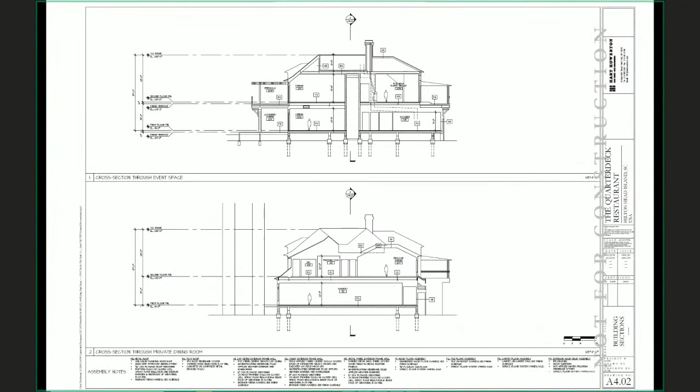Again, it's a little open-ended, so this is a conceptual review because this is a new building. So we'll be looking at this one more time, and at the final, we'd expect to see a more detailed landscape plan. A plan of the building, a roof plan of the building, elevations and illustrations, sections through the building, just a detail of the building.

Sorry. You can see how the porches relate to the dock and the promenade.

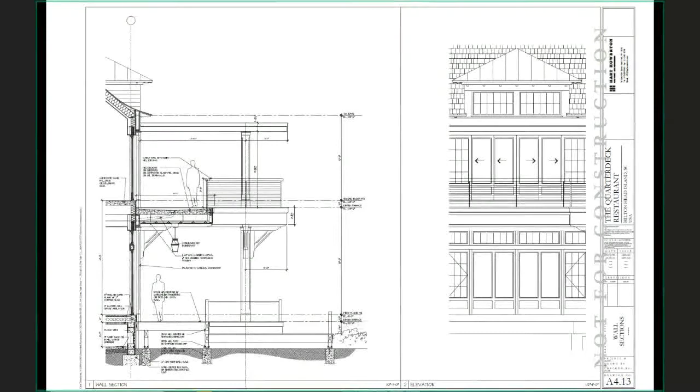Again, more wall sections. This is pretty close to a color board, but I would remind everybody this is a conceptual review.

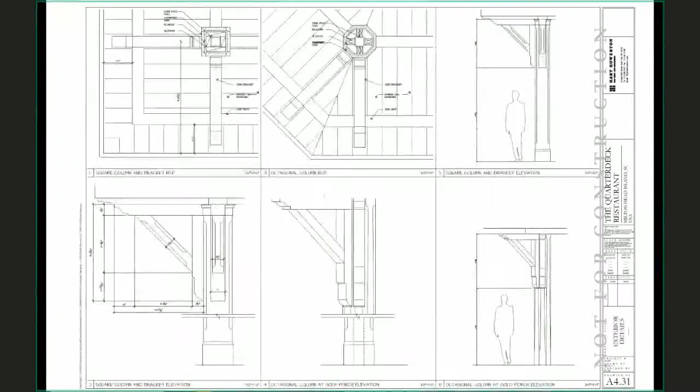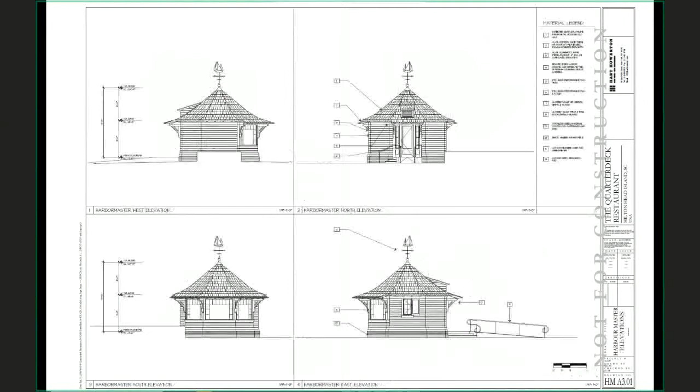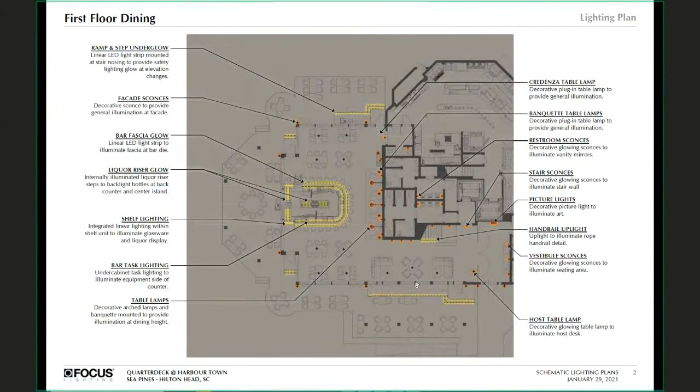Okay, so now we're going into the proposed lighting plan for the Quarterdeck. This is pretty much interior.

Sorry, site lighting. Lighting in the trees, and parking lot lights.

Okay, staff recommends conceptual approval as submitted.

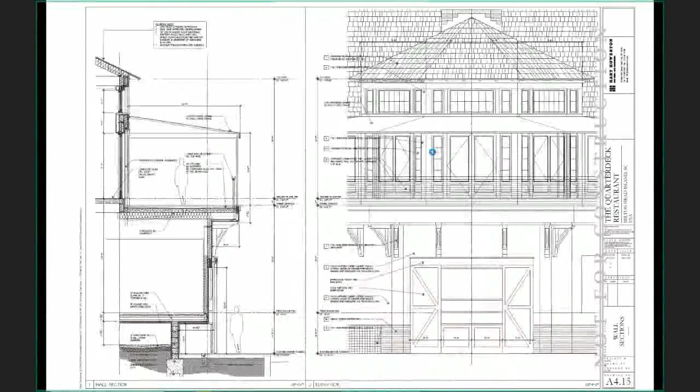And the only lighting related comment I had is for the bollard lights in the parking lot. I was a little curious - I don't have any problem with it - why you guys chose to do that in lieu of a more traditional area light. So if you could respond to that, I was just kind of curious.

Yes, so we're trying to be sensitive to the environment, especially being by the beach there, and wanted to keep the lighting at a low level and indirect.

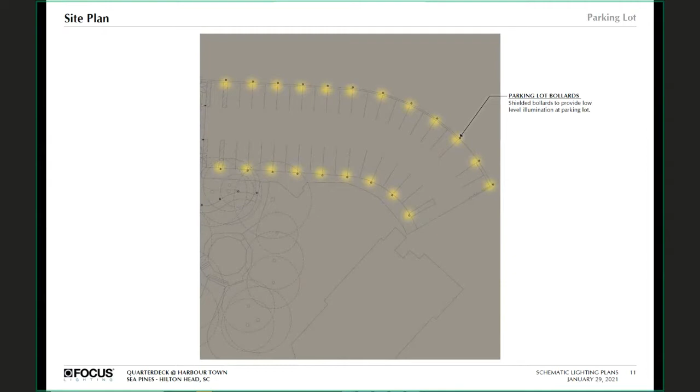Okay, I understand, certainly appreciate that. Of course, we'll be looking for fixture cut sheets when you come back for final. Like I said, I have no problem with what you're showing, but there's going to be a lot of those bollards, so we'll certainly want to know what it looks like. But other than that, I think it's a great looking project, and I believe it's heading in the right direction. Thank you. Great, thank you.

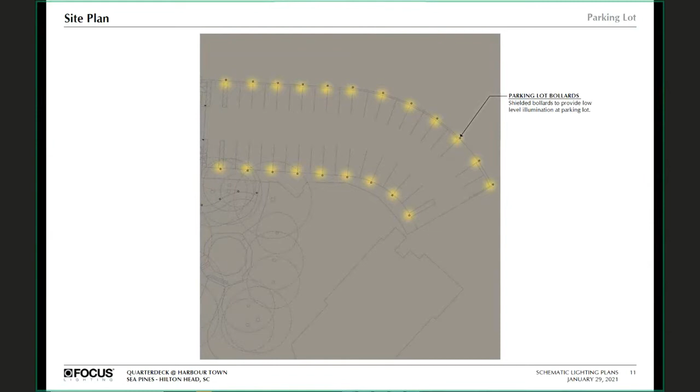I have to agree with staff's comments as far as plantings, and I know that's something that's going to get drilled into for final, especially with some of those smaller cells, just for simplicity's sake. It is pretty nice underneath the oaks there on the northern side, being able to accentuate that. But I know a lot of the beds in the Harbour Town area have pretty simple compositions to them, so if you have that accent, accent appropriately.

I agree with Mr. McAllister when it comes to those shell walls. I know oftentimes a hone tabby treatment is very appealing, and you still get a similar vibe. It's either that, or mixing in smaller oyster shell sizes in the finish can oftentimes reduce those sharp edges.

Especially in this area, you have a lot of different levels, and you still very much have that harbor walk in there. Oftentimes you've got so many people stacked in different places that they're bound to be up against your vertical surfaces. So again, I'd say seek a smoother finish, or a hone tabby would be a great accommodation.

What I would say is more of a transparent handrail, that single rail. Obviously it appeared from the plans that was associated with more of the dining area, knowing that there'd be tables and such. Just being conscious of the drop-offs on the other sides, knowing that oftentimes we see cable rail in those situations, but appreciating that you're trying to keep it a little more open.

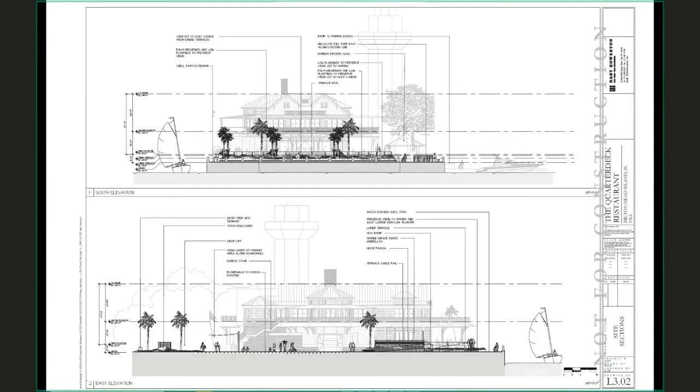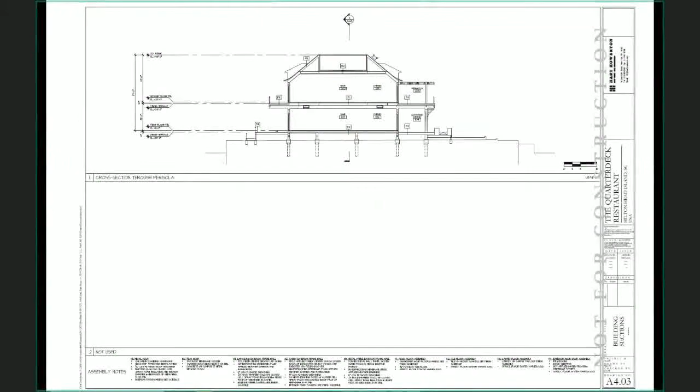And then finally, I was looking at the lighting plan and trying to confirm the thoughts on the string lights associated with the gangway and along the couple boardwalks. Oftentimes, and I think it might be within a lot of the areas around here, string lights are isolated to more of the dining, more of the static areas. So when it comes to running string lights along high traffic areas, making sure we get the coverage we want as far as illuminating things.

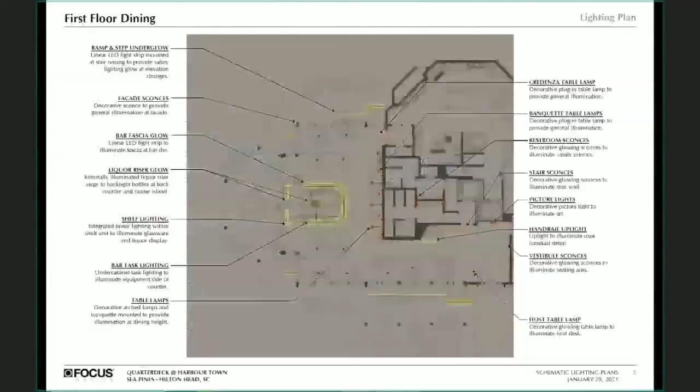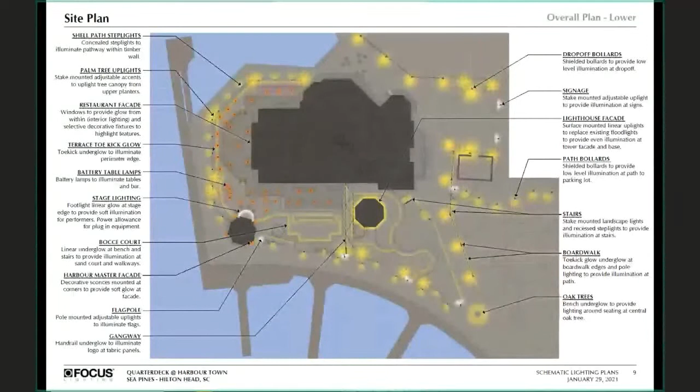Maybe there might be the opportunity, especially on that northern side, of just having more of a lower level light. I'm a little less concerned about the oak trees, the uplighting and downlighting with that—there are really nice ways of being able to do that. So I'm hoping that on that northern side, the illumination within the trees and focusing on the lower level lighting will help out, and maybe the string lights get really focused on more of the dining. I do like the idea of that gangway and the finish that's going to have for the railing.

So I think if that was shown as a section or highlighted in the next set of presentation documents, it would really help out in the understanding. But otherwise, everything looks great. I'm on board with a lot of the staff comments, and I appreciate the effort put forward. If one of my architectural cohorts have something else that sparks a question, I'll be sure to speak up. Thank you.

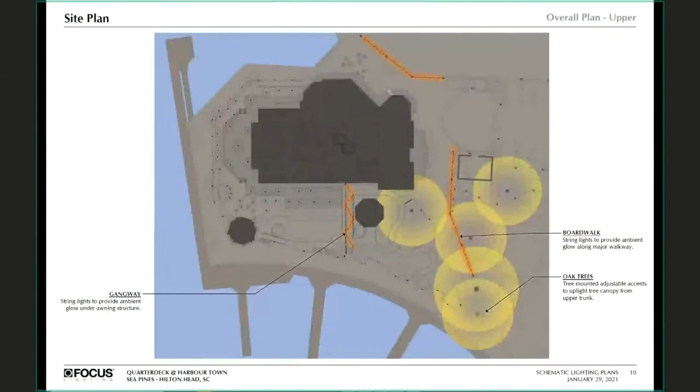So I'm on the architect side, and as you could tell, I initially struggled a little bit to understand the extent of the project, and I'm just going to take it at face value that everything that is getting touched is allowed to be incorporated. Chris, I'm going to ask that you chime in if there's something, but I'm assuming, since you recommended for approval, that changes to the lighthouse entry and all of that is perfectly acceptable within the scope of this project.

That's correct, that's correct—the existing nonconformities, they're allowed to maintain. Okay.

Because I didn't totally understand some of the program, my initial hesitation was about the Harbor Master Pavilion, because when you're on site, the new location does block the view. But I do fully understand that if that's the visibility the Harbor Master needs, then that is, unfortunately, at the loss of the public having that open expanse view. So if that can't shift because of those programmatic reasons, I can certainly understand that. But I do feel that pavilion will close down the view out to the ocean and out of the harbor pretty significantly.

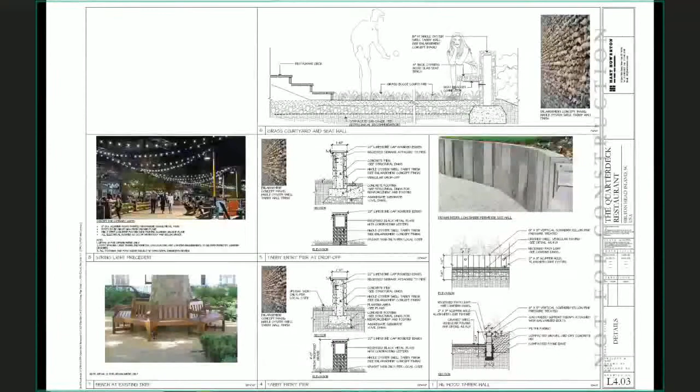The only detail that specifically caught my eye is on the fabric of the guardrail, the proposal of the large Q. I believe that would fall under signage and therefore would have to be a separate submittal. Yep, there it was, the large Q on L4.03. I believe that would have to be a separate submittal, and if that is in fact intended on every panel, it would exceed the signage limits.

Just to note there, that is purely a placeholder put in by the landscape architect. That is not the logo or identity mark for the project at all. Graphic design has not yet begun, so it's just to indicate the intent.

I think it would not be that scale, so we can give you more detail next time. That's what I'm just cautioning—signage is a separate submittal, and there are limits on the amount for the project. I just wanted to mention it because I saw it; even if it's a placeholder and will be smaller, if it really ends up being all around, my gut says—again, you would have to check the math—likely you would be exceeding allowed signage amounts.

Right, okay, understood. This is Chris with the town of Hilton Head. Just to reinforce what Ms. Lippert said, she's correct—you have a limited amount of square footage for signage, and that would count towards your square footage. Okay, understood, thank you.

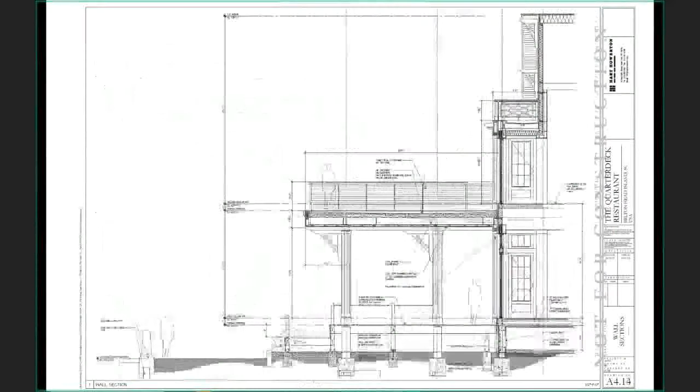Yes, the gas pumps remain. There will be some work to them, but they essentially stay in approximately the same location. And the harbor master's office itself is up 3 risers, so it's up about 1.5 feet from the shell path.

And once you get out to the line along the channel, we have an 8-foot required clearance, and that's for maintenance along that area. But those are our required easements. So everything about the harbor master, including its eave and the steps and the ramp up to it, all stand back from that setback.

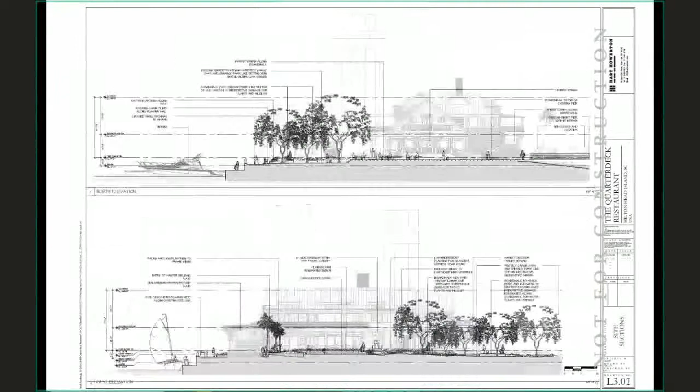So there is a market component to the program, which is a carry-out shop that would have sundries, some food, groceries, as well as a to-go counter related to the kitchen. You could order seafood and other things hot to go out of that market venue. Also, there's an existing ice cream shop in the quarterdeck building, so ice cream would be offered inside the market.

That's positioned so it faces north onto this boardwalk extension. There's an open porch that you can go up and directly into the market there. The market also connects back into the restaurant, so if people want to finish dinner and go straight in and have some ice cream, then go for a walk outside, they can do that through the market as well.

Oh, I know where the ice cream place is. You don't have to worry about that.

So what I was kind of leading to is, in the summer months when it's crowded and someone checks in, where's the dedicated area, if you will, for the families to hang out with all the kids that can't sit still for 5 minutes? Is there a little run-around containment area or something?

Yeah, I was probably one of those kids in my life.

But yes, so we have this gangway experience where you go up to the front door, and once you go in, you're not yet in the restaurant, you're in this reception area, which would have a bench, some art. It's a fairly large space in there. Those doors that you see swinging are overscaled. The main entrance door is overscaled, so there's space in there to wait. There's also this sort of network of paths.

Of course, now everybody's on OpenTable, you get a text message when your table's ready. So some of these paths, the boardwalk experience, maybe even going down to the corner to look at the harbor master area, are all diversions while you're waiting.

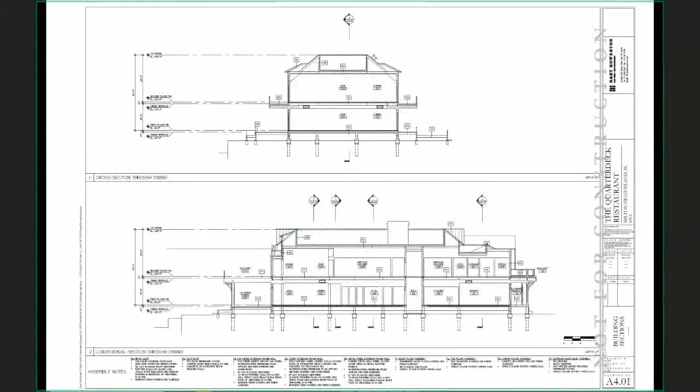My comments come back to the standing seam roof. I'm not a fan of standing seam roofs unless they're non-reflective. I agree that there's too many of them, and that could be cut down, or if you could bring in a painted color for those standing seam roofs so that they're not reflective. I'm going to be totally against reflective standing seam roofs because it'll take away from the beauty that you've got and from the view from the harbor. The boats coming in don't need to see that kind of shining example.

The white sand, and this comes back to a comment I had in mind, and I think John said it earlier - this place doesn't need to match the clubhouse. The clubhouse is in a nice forested area, it doesn't have that many buildings around it. And on the harbor, we've already looked at projects where people are trying to work with that original Portofino concept. This thing is kind of looking like the clubhouse and not looking like it belongs in Harbor Town. I didn't want it to look like the project we just approved on those colors, but all the buildings, the shops, all the way around there have more of that Portofino look. It's subtle, and that's good, but this one is stepping way back from that. While I really like the look of this building, I'm wondering if you shouldn't bring in some more of that Portofino look. That's my opinion.

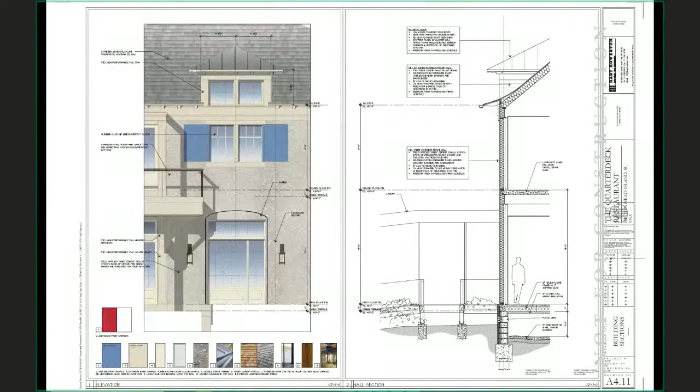Kathy? All right. Yeah, a lot of good comments, and I think everybody pretty much covered everything. My only critique is the multiple style of dormers that you've got going - you've got some gables, some sheds, and some hips. I'd just as soon see that limited.

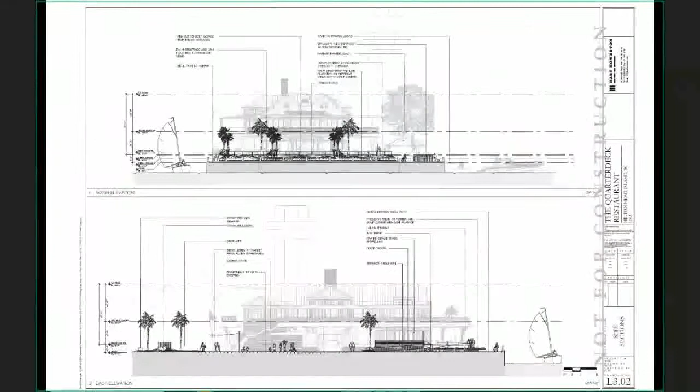There was one poking out that looked like a gable. Where did it go? Let's see, on the go sheet - oh, I'm looking at the landscape drawings, hold on. I think the gables are limited to the large roofs at the ends, but the one on L301... I don't know, I got stuck on the landscape drawings, that's why I was looking at that one. Right there, yep. Is that just one poking out behind another roof, or is that actually one of the ends of the double roof?

It's a dormer, the back end of it. It's really up over another roof, so it won't be very apparent. It's meant to be one of the high gables - I just read that wrong on that particular drawing. Okay, it's on the one below it, same elevation, and there's 2 different styles of dormers. I just found that a little off kilter, but if that's the worst comment I can come up with, that means you did a pretty good job in my book.

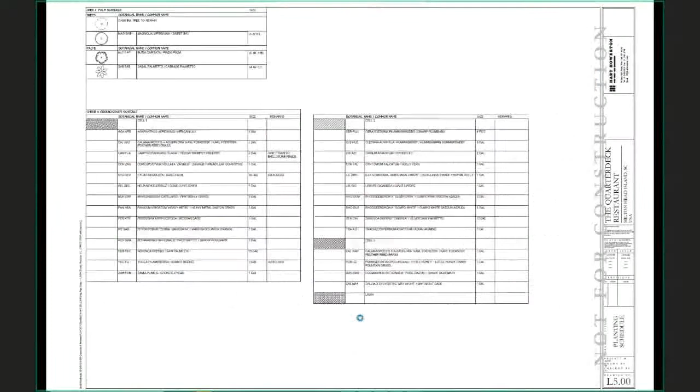I agree with the first comment from - let me see who said it - Miss Lippert, about the standing seam metal on just the dormers. I'm fine with that if it's not a reflective color like Miss Foss brought up. If it's something that more blends into the roof color - if your shingles are a weathered wood color, then that standing seam should probably be more in that vein.

A darker color, not a shiny one, because they're not architectural features that you necessarily want to draw the eye to. I mean, they're okay, but I think Ms. Foss had a good point that on a sunny day, those will be the things that stand out. So I don't have a problem with putting standing seam over a porch or over a dormer, and everything else be shakes, but the color would be the important thing to me.

I guess we'll see real samples at the next submittal for the white sand and the shingles and all that. But overall, I think it's great.

There was a lot of discussion on the location of the harbor master. I think you made a good point - where else would you put it? Seems to be a functional spot, and I don't think it really blocks anything. So I have no comment on that. I think it becomes part of the architecture and part of the landscape. So I think it looks really good myself.

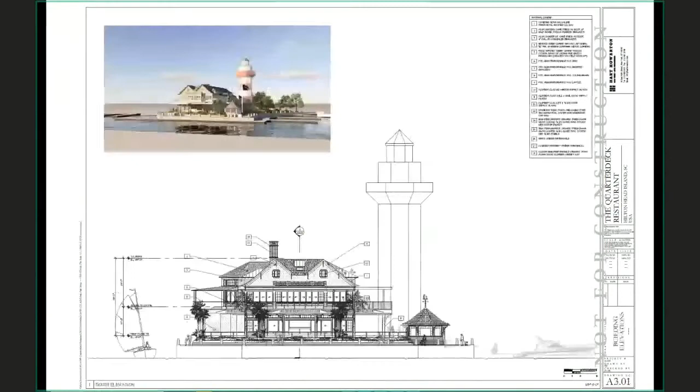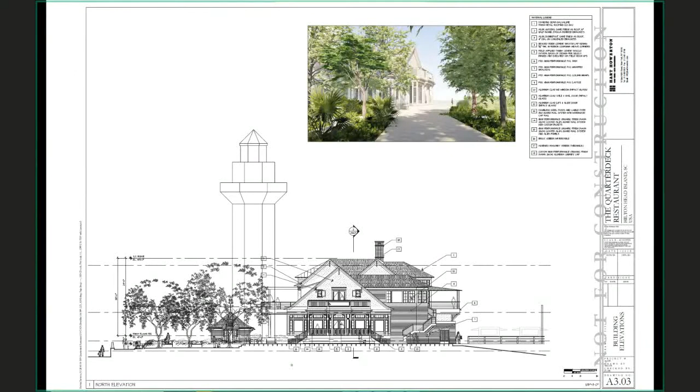I think there was a comment that there might be too much tabby. I don't really agree with that comment because a good portion of the lower level is windows and trim. And then you've got those big gables with the tabby, right there, that makes sense, so you wouldn't want to break that up. And then you've got that double lap siding in certain areas. So, overall, I think it's a good job, and I look forward to seeing the final.

Right. Anyone else need a second round? Michael?

Oh yeah, Judd, yeah. I want to thank Cliff for outlining how the orientation of the building is differing from what's out there now. I certainly understand where the harbor master is, and really emphasizing that circulation that he and David hit on, that the circulation is going to be pushing more across that northern side of the building.

I think that plays into my comment on the string lights. The current pier has a lot of gooseneck fixtures, and I think that might be another fixture you'd want to consider, to be able to tie the pier back to the harbor along that line. So in lieu of the string lights, the gooseneck - and maybe since you have the string lights on the gangway, they could even be introduced at that bocce area as something fun. And when those string lights come in, we'll want to understand how they're mounted, as far as the posts and such.

Let me see, oh, one last thing. David, Mr. McAllister, had a concern about the outside of that sundry shop and being able to have a planting area. I think that counter makes a lot of sense, but I still think we might want to leave an opportunity for just something to soften that side. I mean, hopefully we'll have a lot of traffic and a lot of seating associated with it, but if we give ourselves at least an opportunity to soften that northern side of the building, with either the ability to bring in some palmettos - it doesn't have to be big, large areas - just something along that facade up against the building would probably help out a lot.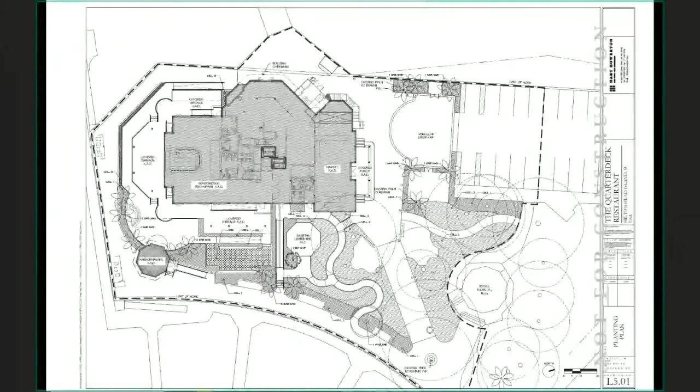So I ask that the shape of that service yard be reviewed to make that less of a pinch point, since we're now saying that's really our main route for pedestrians, we're now routing them past the back of the house elements. So I think that needs to be made more pedestrian friendly, and its shape made such that it doesn't pinch the walkway as much.

I'd like to go back to that utility area, because on one of the drawings I saw that it sends you to the mechanical, electrical, plumbing drawings. Is there going to be noisy equipment in there? Because that is, again, opening up to the area that the public is using.

The main piece of equipment in there is a transformer. It exists there today, and it's in an enclosure which is slightly differently configured. We're leaving the transformer in its location because it was just put in and it's quite expensive to move, but we're just reconfiguring the fence around it to make way for the motor court. We were able to do that without impacting the transformer itself.

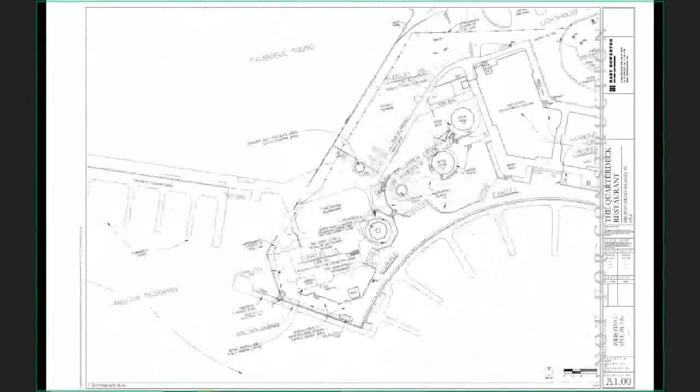Okay, and the final comment I have is I was not able to see the gangway fabric canopy in any of the elevations. Did I miss that? Because again, I still do have the concern that the Harbor Master Pavilion is blocking the view for the public. While I understand the explanation about how the new building orientation is fantastic for all the occupants, for the people who are just visiting the public spaces, I think that Harbor Master Pavilion still is negatively impacting it. And the more I look at it, this canopy of the gangway is yet further blocking that view.

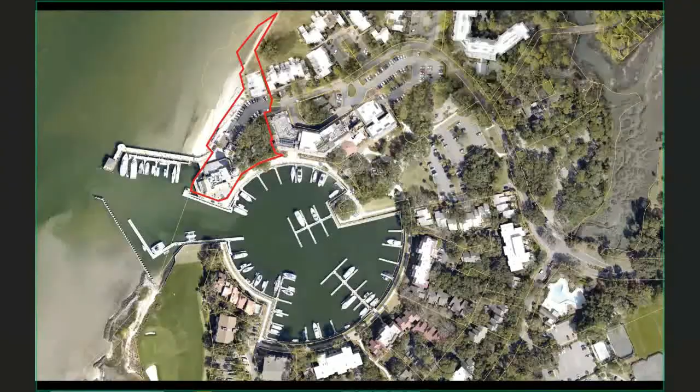Is it shown in any of the elevations? Isabella, do we have that in this? We missed that, but we can most certainly show it in the final. We have it detailed pretty clearly, and it's dashed into the landscape drawing there. You can sort of see a heavier weighted dashed line.

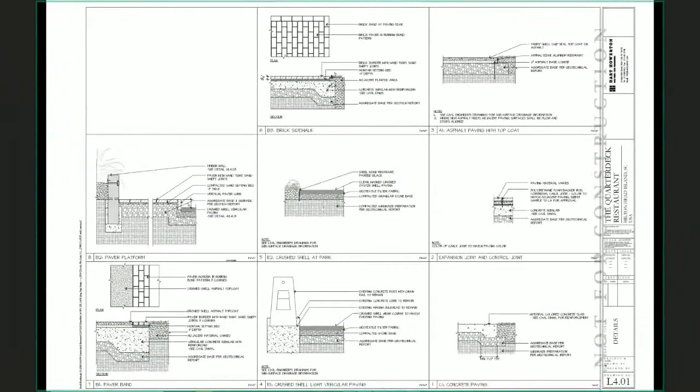In terms of public experience of that area, the lighthouse is really overpowering that canopy there. It's just sticking out far enough that someone walking along the crushed shells path would be able to see it as an indication of the restaurant, the entry to the restaurant. And when you're standing on the other side of the lighthouse, that's going to be the last thing you're looking at, really.

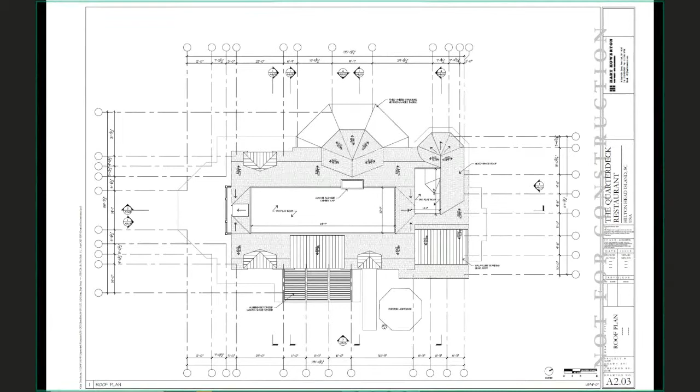I'm just saying I'm going to be looking for that one with particular focus during final, because I feel that this view is getting pinched by several elements, that canopy included, the Harbor Master Pavilion included, which maybe can shift a little bit more off that corner and a little bit more, let's say, towards west, essentially, to shift up on the drawing. I am concerned about the public's view being impinged now by two elements of the project. I think that's it for my second go around.

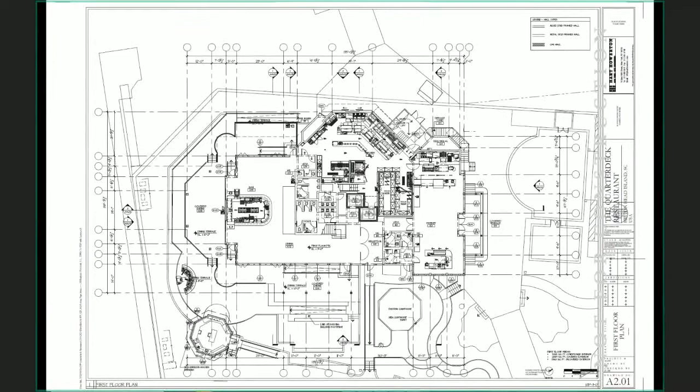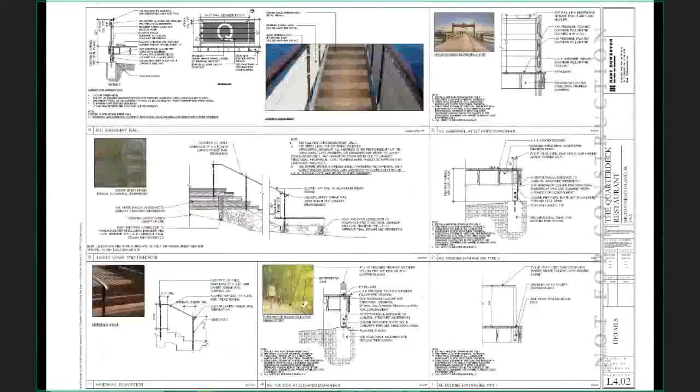Just to respond, just to add some information. I don't know if we can go to one of the site plans that has the proposed site plan, it might be towards the beginning of the set. There, that one. So this is the proposed site plan, the dark hatched footprint, and around it at a 45-degree angle you can see the dashed lines of the existing building to be demolished. So when people are coming around the shell path now, their view is being cut off by that outermost tip of the building today. So actually, by rotating the building 45 degrees, we picked up these views that Cliff was talking about, directly into the harbor, directly down to golf, and directly out to the sunset.

But we also felt like we were opening up the whole end of the harbor so that it was much more light and airy, so you get a bigger aperture between the seawall at the harbor and the new corner of the building than what currently exists, if that helps.

I hope you're right. I spent an hour out there on Saturday with the drawings, orienting myself next to the existing building and sort of spacing out where the new facade faces are and the new pavilion proposed and all this. Just my impression, it's impinging in two manners on the current public view. Okay, appreciate that. Thank you.

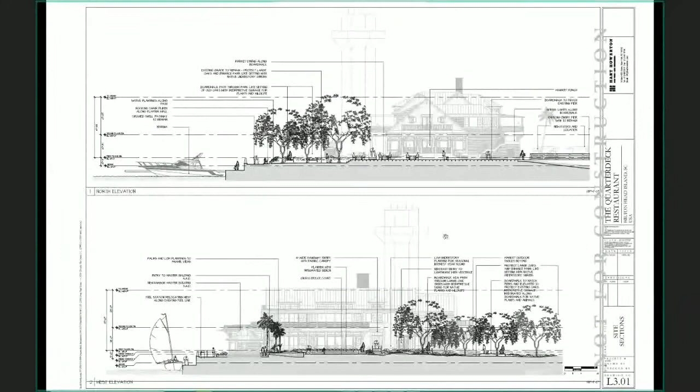Anybody else? Yeah, I have a comment I wanted to add. Now that Ms. Lippert, and you could go back to that previous site plan you had out, was helpful. So now back to, okay, we got the new boardwalk, but the intention is to try to get people to make that right, walk down the boardwalk and head around that way.

And again, this is just me talking as a parent with 3 young kids. So where we got the vehicular drop-off area there, if that's going to be where most people are parading by, is there any way - you might have to lose a little bit of parking space - but any thoughts into creating, make up a number here, like a 5-foot buffer. Right where that vehicular drop-off semicircle is, maybe 5 feet off of that, have some plantings or something low, just so as people are walking by it visually creates a little separation between the walking path to head out to the boardwalk, and where we go to wait for someone to pick you up or drop you off. So it's not as tempting for children to run into that vehicular drop-off area.

Right. So that would be one comment there I'd ask you to give some consideration to.

And then the other would be, now that it's jogging my memory how the utility area is there with the dumpsters, I don't know if it's all built out of 4x4 post and 6 foot tall or whatever. But again, if everyone's going to be walking past there, make sure there's an effort into making that look as attractive as you could make a wooden wall that's covering up dumpsters look, as I'm sure you...

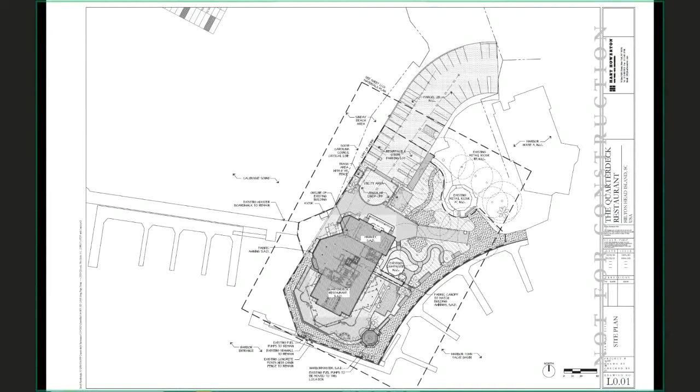Anybody else? Would anyone like to make a motion? I took very detailed notes, so I will dive in, and people can feel free to correct me.

From Ms. Lippert: I make a motion for approval of DRB 000212-2021 with the following conditions. All of staff comments. The north side of the wood boardwalk to have some plant beds added to them.

Detail 4 and 5 on L 4.03 to review the color of the sign face, as black will likely not be approved. Detail 6 to review the tabby seat back with the recommendation of potentially introducing smaller tabbies or honed edge tabby to make it more user-friendly.

A reminder to provide light fixture cut sheets at final. Reminder that Sea Pines ARB approval be provided at final. There was one comment I'm eventually going to have to get help on, which had to do with the transparency of the handrail - so whoever had that, please keep that in mind for helping me modify it later.

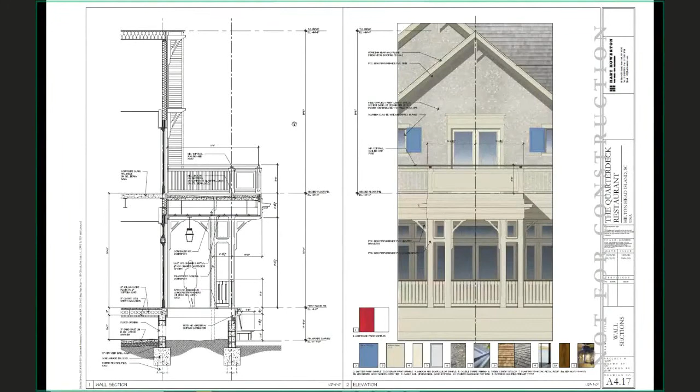Is there a second? I'll second. Second from Mr. Karstens. Teresa, would you please call roll?

Certainly, Mr. Chairman. Ms. Lippert, yes. Ms. Foss, yes. Mr. McAllister, yes. Ms. Remke, yes. Mr. Molesky, yes. Mr. Karstens, yes. Mr. Genteman, yes. So the motion passes unanimously.

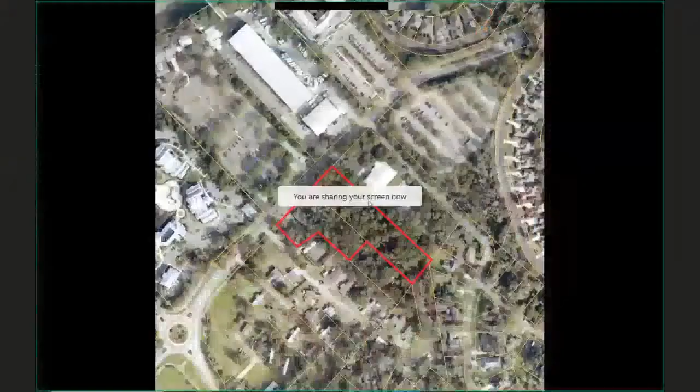Okay, the Gumtree Road circle at the end of Gumtree Road is in the bottom left of this slide, with Squire Pope heading towards the back gate.

Of Hilton Head Plantation, which is up at the top right-hand corner of the screen, and the proposed site of the development is outlined in red.

Immediately adjacent to it, where the cursor is, is a fire station.

There's a restaurant over here, with its associated parking, along with dry dock storage here. If anybody does not know where we are, please let me know right now.

Okay, not hearing anybody. This is Mount Calvary Baptist Church. The applicant is seeking to construct a new church building next to the existing church building and expand the associated parking lot. The existing church building will be converted to the parish's fellowship hall.

The new church building will be a pre-manufactured metal building with wood stud walls, finished in stucco and cement board lap siding to match the existing church. The roof will be constructed of metal standing seam roofing panels.

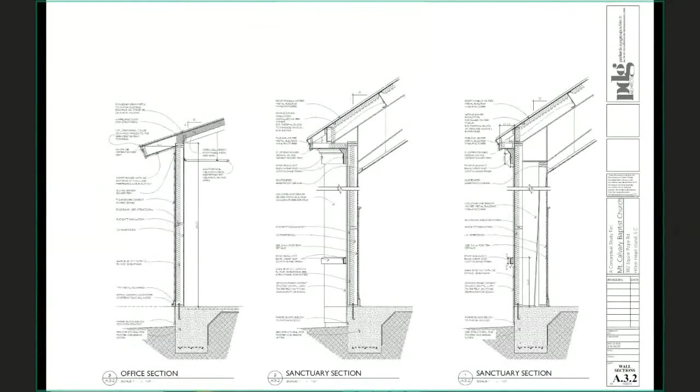Staff recommends approval as submitted. Now, I would point out that this is the final. The conceptual was approved end of last year.

Thank you, Chris. Oh, I'm sorry. Mr. Chairman, I'm sorry. Yeah.

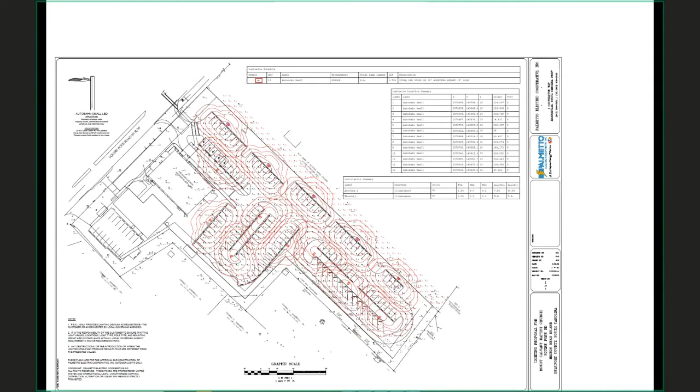The 11-inch laurel oak is in this area, and then there's a live oak, 26/27, meaning it's double trunked, and the specimen live oak here, which is 24/25, and then there's another trunk that's 25/19 and 15 at the back of the site.

That the tree protection area around those trees be enlarged to a 15-foot minimum, and provide 4 inches of composted wood chip mulch within the tree protection fence. This is prior to construction to help prevent compaction of the roots under these trees.

And third, specify on the tree removal and protection plan pre- and post-construction fertilization and mycorrhizal treatment. Again, because so many trees are being removed from this site, staff suggestion is that the trees that are to remain get treatment to guarantee their survival through construction.

Second, shift catch basin number 8, which is this one, two parking stall widths away from the laurel oak there, to reduce disturbance close to that trunk. So either shifting it down here or shifting it back up to here.

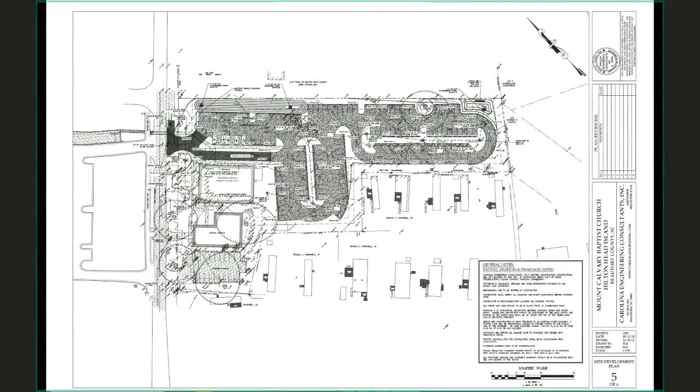Yeah, thanks for that. I'll echo the same comments Jed made with the sidewalk, but again, good point there, Chris, with my comment about sacrificing trees. Back to the site plan with the front parking and then the middle parking area, it looks like right where you transition from the middle parking to the back parking, that peninsula sticking out there pretty far with the proposed live oak. Is that just something visually that looks like it sticks out further than it should, or is that something that could impede the vehicular flow, or whatever the fancy word is for that?

David, you got that? John, who are you asking that question to? I mean, I guess the question probably goes to the civil engineer that laid out the parking plan. Yeah, I can answer that.

The town requires a 15-foot wide landscape island at the end of a row of parking, and the width of that island is 15 feet. Okay, so that's to abide by that.

Now, that doesn't look like it infringes upon the fact that we have, not that this is a 278 or I-95, but 2 lanes of traffic going back and forth there - there's enough room for people backing out and all that kind of stuff. I don't know if that just creates a tight area. It just looks that way to me, looking at the site plan.

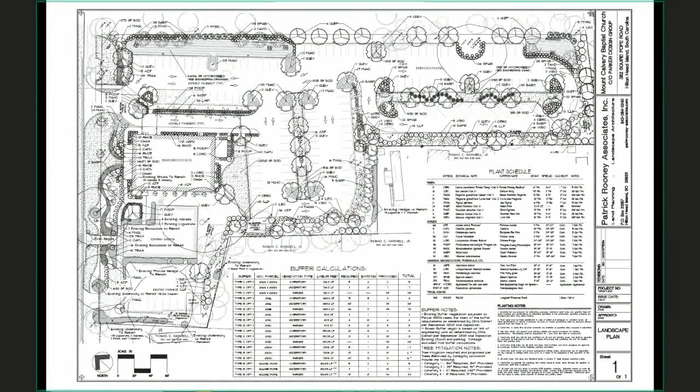Ms. Moss. Thank you, Mr. Chairman. I was not here for the first conceptual review, so I don't have anything to bring today beyond what I see. I agree with staff comments. As far as those shutters go on the left side elevation, they kind of tie in with the front elevation, so that shows an entrance, the walk-in entrance versus the drop-off entrance, and I kind of like it. It works in an artsy way, and it's defining an entrance. That's all I've got. Thank you.

Ms. Voss? Yeah, I was going to bring that one up. Because if you look on the front, as Kathy pointed out, you have the double shutter, and the ones on this side just happen to be closed. And then that window is separated from all those other windows on the left side by the porte cochere. So does that change your viewpoint at all, Annette and Debbie?

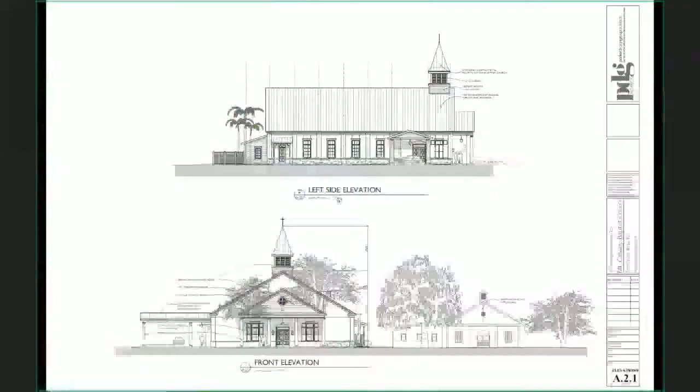Or Debbie, either? Can you remind me of the colors of the shutter relative to the body color? What is the shutter color? Can you go to the color board, Chris? I can actually pull it up on my phone. I photographed it yesterday. It would be a darker brown. And then the facade is a cream, in the range of the creams. I think it's the first sheet.

Let's see here. Shutter is the Turkish coffee. Yeah, you can see it's a dark brown, a bronze color. It doesn't change my opinion, but that doesn't mean I won't lean towards the majority, or just have the one dissenting vote, let's say it that way. While I understand that it is a continuation of the outside, I'm seeing it's going to read like a T on the side of the facade because of the contrasting color. If it was a slight shade gradation, I think I would be more open, but it is a dark brown against a cream, and therefore will not read as vertical, but instead will read as a T, and that's where my comment came from.

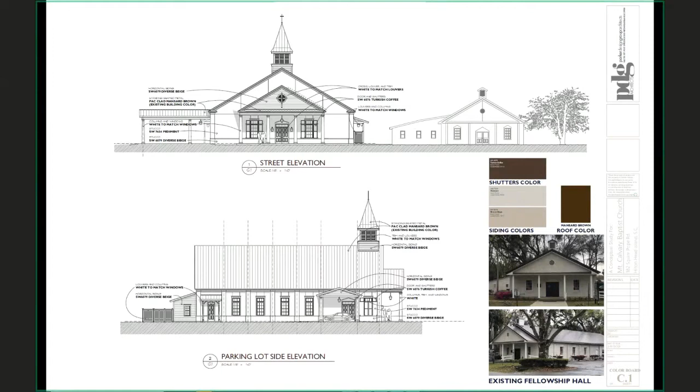Good point. Kathy, back at you one last time. I'm still good with it being the closed and open shutter part on that. Okay, all right. Well, we're not gonna hold you guys up over a shutter. Tim, you're the architect. What do you think?

Well, let me add this. They are functional shutters, meaning they're on hardware too, so they're not just applied shutters. They could close them if they wanted to. I think they'd like to have the natural light in the bathroom, so those windows are pretty important to us being there in the transom, just to get some natural light. And the shutters, like I said, are functional, so you could possibly close them if you wanted to. If they were just applied, I would agree with that. I mean, it is a detail we've used quite a bit on residential construction. I wouldn't say it's abnormal.

Well, let's just say during church when people are in there, somebody will reach up there and open them, and they'll only be open for 90 minutes, and then once Bible study's done, they'll close them. So, I don't want to be a stickler over that. I think the argument that they are operable and they can close them - Annette could jump up there and close them if it bothers her.

So it looks like really we just have landscape comments, parking lot or landscape comments. So unless there's anything else beyond that, anybody second round?

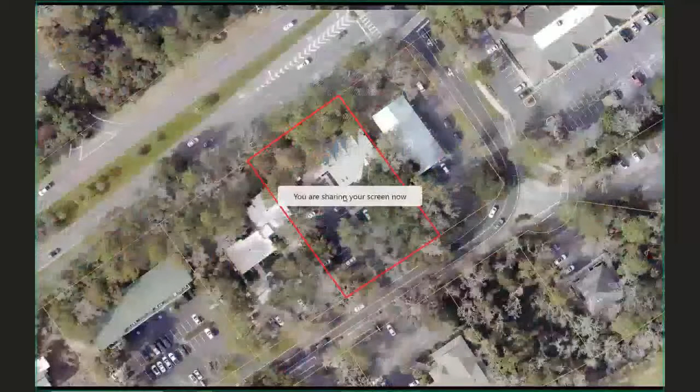All right, so we move on to Alteration Addition, Charlie's Outdoor Dining, DRB 000330-2021. Chris?

Thank you, Mr. Chairman. On your slide, diagonally at the top left of your screen is William Hilton Parkway. New Orleans is running diagonally on the bottom right. The site is outlined in red in the middle of your screen. Riley's is to the right-hand side of the site, and Nunzio's restaurant, which you might remember earlier, is down at the bottom left-hand side. Let me know if anybody does not know where we are.

Okay, not hearing anybody. This project will provide an outdoor pavilion on the front patio of Charlie's Restaurant. The concrete patio will be replaced with a new 450 square foot outdoor wood-framed pavilion with a metal roof that is designed to match the existing restaurant design without detracting from it. The pavilion will include new fan-mounted lighting and natural gas heaters. A small side stair will be added to the front porch for food service, and a gutter will be added to the existing roof to divert rainwater in this area.

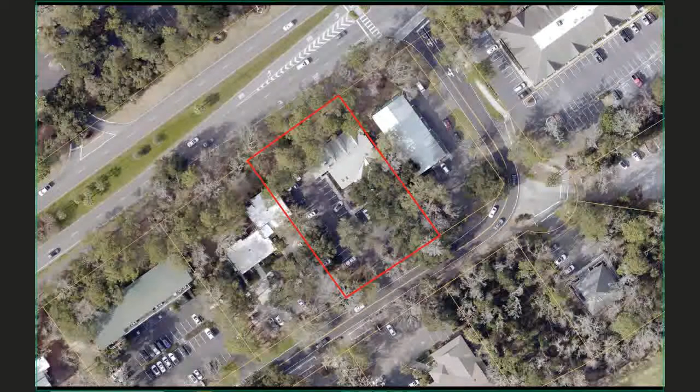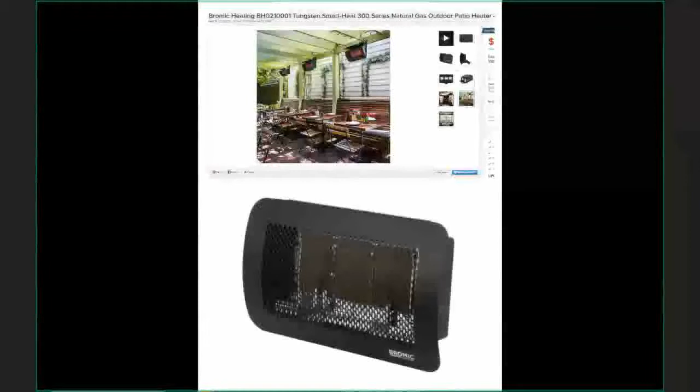That's a wonderful question. The owner was going to repave that patio anyway because it's deteriorating. So as part of that, we're going to run all the new conduits, power, and the natural gas source underground. When it comes up and you have to get to the heaters, it will be within the column wrap, in the column.

Mr. Chairman, yes sir, I appreciate that comment, and I would request that be noted on the plans. Yes, that'll be a condition to do that. We've become sticklers on that.

Steve, could you just run us through it? It's going to go up through the column, and then they'll have to go through the beam at some point, like that middle layer of the beam. They're going to mount to that beam, so we may end up having to fur that down ever so slightly to get that conduit in there.

So it'll come up through the column, and where will it come out of the beam? Will it come all the way up to the rafter? You can see the large triple 2x12 that's on there. It'll be, we could fur out the bottom of that. There's a piece of trim there anyway. And then it goes up to the rafter? Mm-hmm, and hold tight to the rafter.

Thank you. Debbie? Mr. Molesky. Yes, on one of the plan views I saw, there was a 6-inch gutter that looks like it's going on the existing structure. Are there gutters planned for the addition? We had not planned on any gutters on the addition. Right now, the building doesn't have any gutters at all.

What our goal was with that one singular gutter is the existing roof shape funnels an awful lot of rain into that one corner, and that's where the servers are principally walking back and forth. So we intended to get as much of that rain out as possible and leave that one little triangle of dripping, but I didn't want to line the whole thing with gutters, to be honest. It seemed dissimilar, and the new gutter is going to be somewhat behind the roof structure anyway.

If you do decide to add gutters later, we'd want to make sure it's something appropriate, as I'm sure you and the owner would as well. The only thing I'd say is, you mentioned trying to make everything congruent with the existing structure, but the existing structure has all gabled ends, and here everything is hip. It seems like the roof overhangs on this addition are minimal. Maybe site constraints had something to do with that, but I'd think you'd want to maximize those overhangs to provide greater protection for people seating in there. I don't know what the thought process was on that.

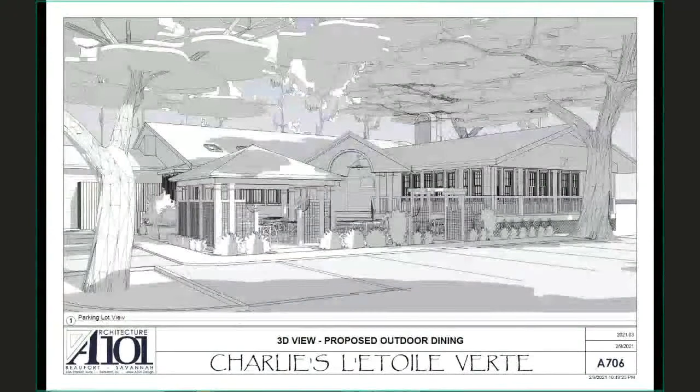I think the project looks great. I appreciate that the entrance to the existing building comes off on an angle, so you offset the second one and didn't just do an L off the whole building creating a tunnel to get in there. I think you added activity to the front and also gave your outdoor seating areas interest. I appreciate that a lot of low country buildings, the older ones, have been added onto, so we have to allow for additions, and I think you did a great job. These sit in front of the building, but I don't think it takes away, and I don't have any issue with it. I really appreciate it.

Thank you, Kathy. Yeah, I'm most in agreement with Ms. Foss. I think you did a nice job nestling it in there so that it is secondary. Mr. Molesky made a good point about that one valley that's going to be dumping water on that tabletop.

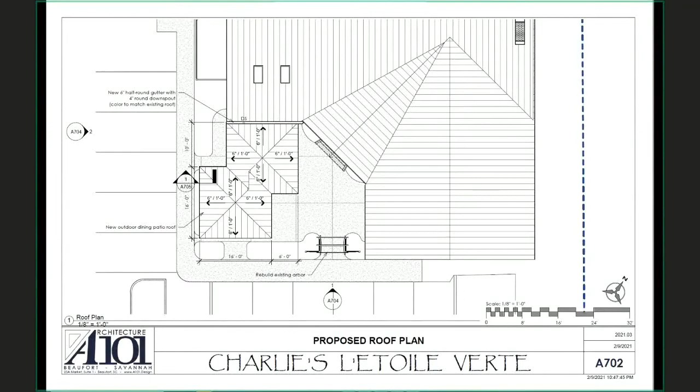even closer to the ground. And if we raise it a foot and make those overhangs 2 feet, then you've kind of negated - sorry about my dogs - you've kind of negated everything we've done by raising it.

So I think the abbreviated version: if it's a torrential downpour, then nobody's probably going to be out there anyway. If it's a light rain, you're good. And if you were to gutter it, Steve, that might even give you that extra 6 inches of overhang, and maybe get rid of some of that splashing water that might be coming down. But I'll leave the gutters up to how you guys want the restaurant to function. But I definitely think it should be raised.

Steve, do you want to? I can't see you, but do you want to comment? Yeah, I'm sorry, I didn't know - is my video not showing, guys? Well, I can't see everybody at once. There we go, okay, I got you. Okay, yeah, go ahead. No, I agree.

I think it could be a foot taller, and it wouldn't change the visual. I don't think we would go much taller than a foot, because I think it'll start to overpower everything. If it needs to be a foot taller, I agree. I think that could really add something to it, and certainly help for the restaurateurs, the diners who are sitting at those windows right there in the front windows. That would certainly help.

To Judd's point, instead of 3 feet, could we maybe say 2 feet on the sidewalk setback? Because we had staff and I had an awful lot of conversations about that 18 inches, and what we agreed to was that because of the unique sort of orientation of the double square, we went 4 feet on the front, and then we also stepped it back in the back.

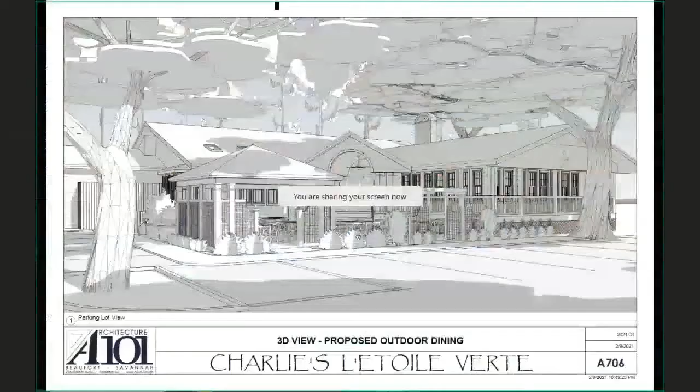Steve, it's funny, if they were going to redo the sidewalk on that side, I'd actually say make the sidewalk bigger and you could get away with a lesser planting area. The only thing I've noticed is that with those wheel stops, you don't get all of that sidewalk, so especially through those three spaces, it's going to be really tight.

Hopefully some of the circulation ends up coming across. Maybe you can't really come in through underneath the structure to the main door, you're still kind of coming around. Whatever space you can give that, knowing we're not going to expand that sidewalk, and still keeping that jasmine, because inevitably somebody's going to have to step along that edge, or people are just going to be walking single file.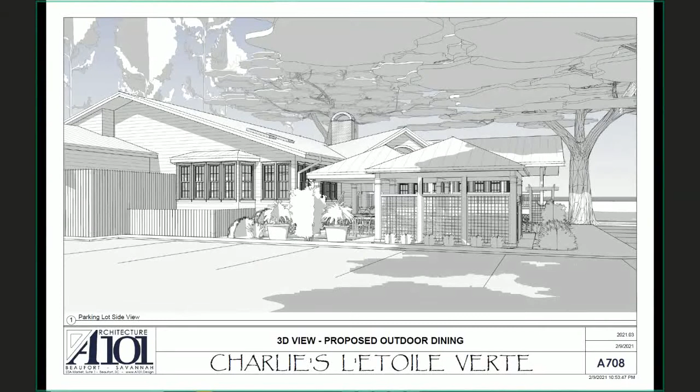I could keep it the same. It's just in my brain, I know it's going to get really tight whenever they're busy, and they just have to be comfortable with that, because between vehicle, sidewalk, structure, and people dining, there's a lot going on in a tight space. If that's part of the charm and part of the quirk of this entry courtyard, then that's part of it. So if they're comfortable understanding that the functionality of that sidewalk gets greatly reduced because of the structure, then we can keep it at 18 inches.

Just keep the jasmine in there, because there still will, like Dave McAllister's point, be an area for people to step into within that 18 inches, because the jasmine's growing up, not necessarily filling out the ground plane. So let's circle back and ignore my comment about pushing the structure back, and as long as the family's aware of how tight that's going to end up being compared to now, I think it's all good.

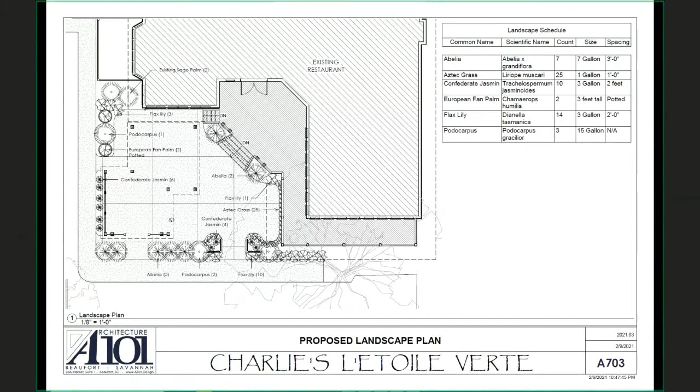So if at peak somebody's parked there and you have to kind of scooch past the car, it's just, I know, it's part of the charm, as you said, right? Yeah, I've been out there enough times.

Right now it's open, and while we were talking about this, I pulled up Street View and I see a pickup truck parked along that edge, overhanging at least a foot to maybe 15 inches of that sidewalk. So like I said, you're going to end up coming down to where you're walking single file, which for a 4-foot sidewalk, you typically aren't necessarily side by side anyhow. It's just a product of the wheel stop location, the sidewalk width, and the structure.

All right. What do you think about raising it a foot? Anybody against that? Think it's a good idea? Kind of get it up out of the windows?

Annette, I think it's a good idea. I think it definitely would just need staff and you approval just to double check the proportions, because right now the proportions work really well of roof to structure. I'm definitely not a proponent of bigger overhangs, because I agree Steve has studied that well, the roof mass is not overpowering to the existing structure.

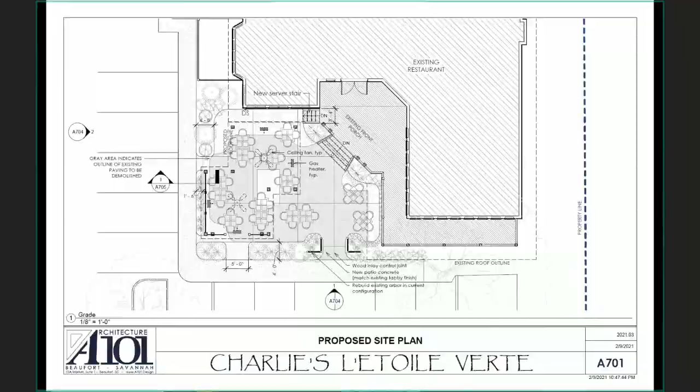I realize that raising has nothing to do with the overhangs, I just wanted to throw that in there. I would definitely not increase the overhangs, raise it, and you just have to check what happens to the columns so they don't start feeling too skinny. They may have to go up one size to still feel in proportion. That's my only concern with raising it, but for the diners inside, I think it's a good idea, and whether it's 10 inches or 12 inches is a little bit of a proportional study.

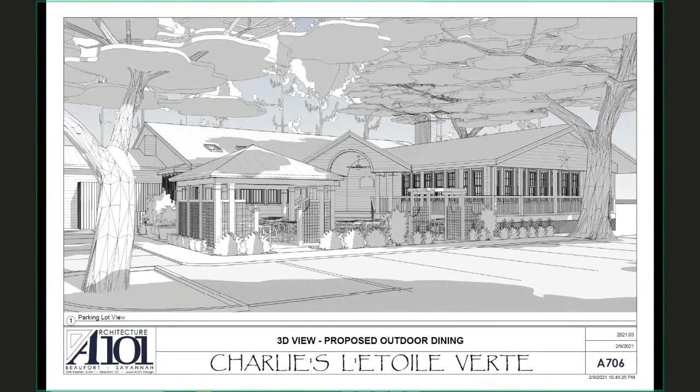Yeah, I have full confidence that Steve will line it up correctly. It's just, looking at that elevation we were looking at, if it lined up with... let's give them a benchmark so we don't have to play a guessing game.

If the top of the beam were to visually line up right in there, almost like taking the top of the column and putting it where the band board is right now, the fascia board, so we can get it—it looks like it might be a foot or so, and I think that'll still work. Or line it up with where you have visually with that fence on the left.

I think that'll work. I'd be happy to look at it, but assuming that beam is 12 inches deep, because they're 2x12s, I just think we're moving that up 12 inches, and I think that'll make a lot of difference.

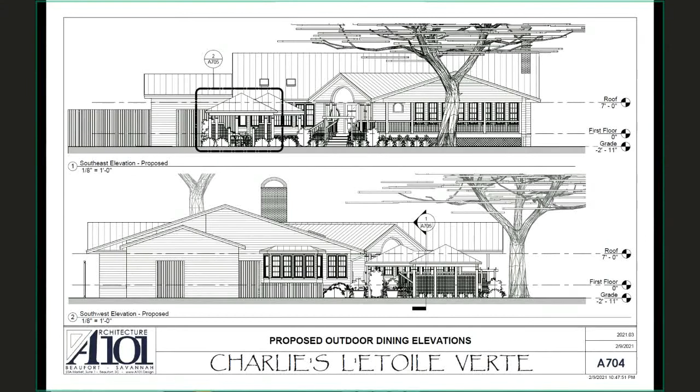We don't need to beat that to death. Anything else? Anybody? All right. Anyone with anything? Steve, Chris, anybody? Any last comments? All right, good. I'm good. Okay, I'm good.

Regarding Charlie's outdoor dining, DRB-0000330-2021, approval with the following conditions: raise the roof approximately 12 inches to get it up out of the windows, adjacent windows to the interior. All electrical conduit and gas piping is going to be hidden in the columns and may exit the columns up at the beam and the rafters, and should be held tight to said beams and rafters. The existing fan on the existing porch should match the new fans. And I think that was it. Did I miss anything?